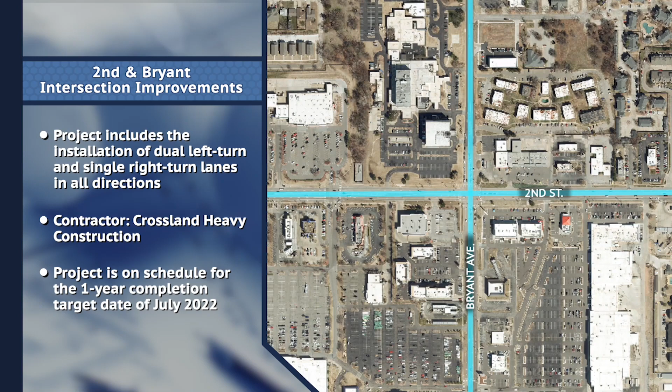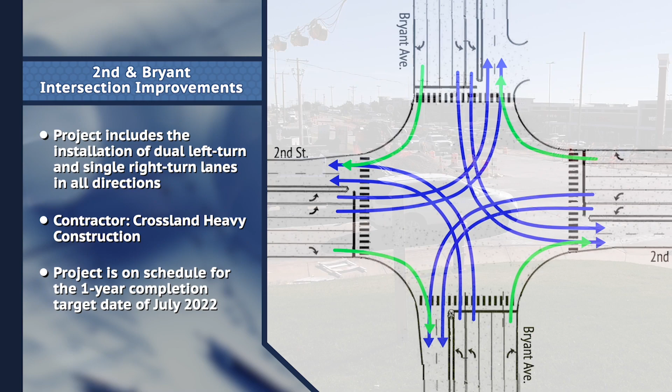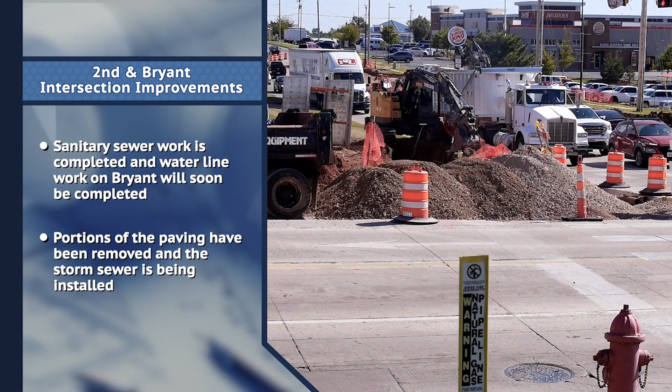The first is an update on the intersection improvements at 2nd and Bryant. As a reminder, this project includes the installation of dual left turn and single right turn lanes in all directions. The contractor is Crossland Heavy Construction, and they are on schedule for the targeted 1-year completion date of July of next year.

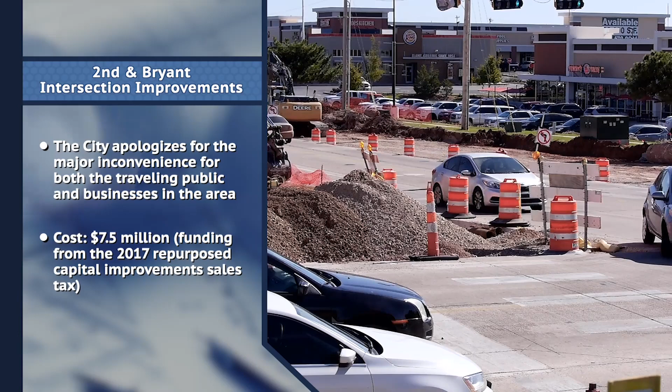The sanitary sewer work has been completed, and the water line work on Bryant soon will be completed also. Portions of the paving have now been removed, and the storm sewer is also being installed. As a reminder, we apologize for the major inconvenience to both the traveling public and the businesses in the area, because it's a rough area right now. But traffic is still moving through it. I went through it again this morning and noticed that you can get through.

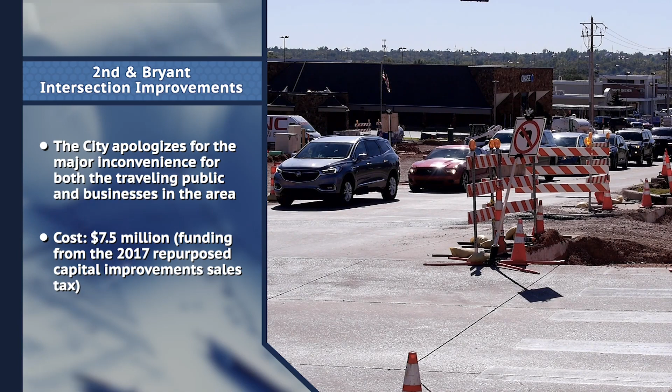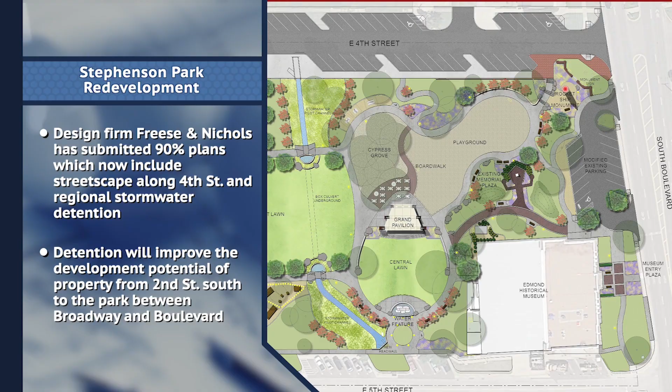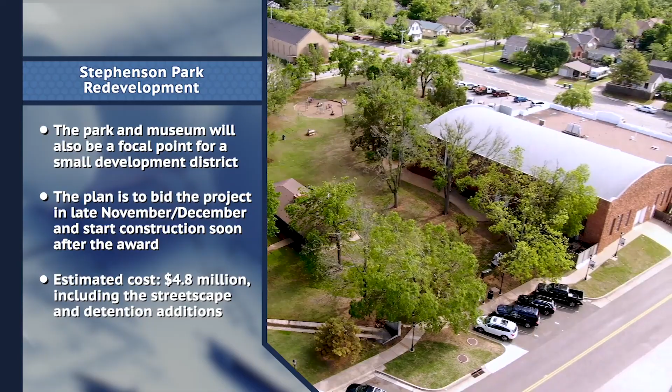The detention will greatly improve the development potential of the property from 2nd Street south to the park between Broadway and Boulevard. And the park and the museum will also be a focal point for a small development district as a possibility as well. The current plan is to bid the project in late November, early December, and start construction soon after that. Our people will know more about the specific timelines as they get closer to the bid date.

The estimated cost of the project is about $4.8 million. That includes the streetscape and the detention pieces that have been added. $3 million of that cost will come from the city's allocation of funds from the American Rescue Plan Act. The rest of the funding will come from the 2017 repurposed capital improvement sales tax.

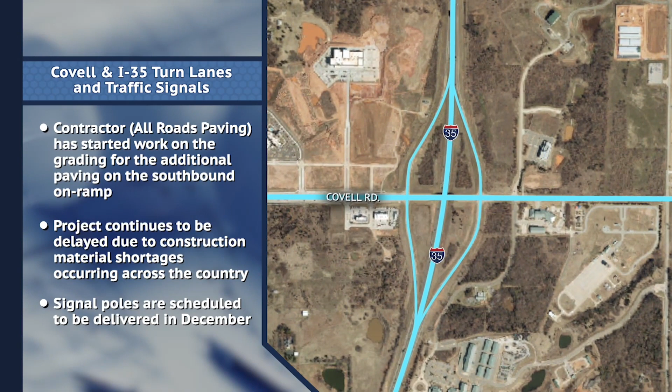The third item is an update on traffic signals and turn lanes for exit and entrance ramps at I-35 and Covell. All Roads Paving is the contractor for this project, and they have started work on the grading for the additional paving that will be needed on the southbound ramp.

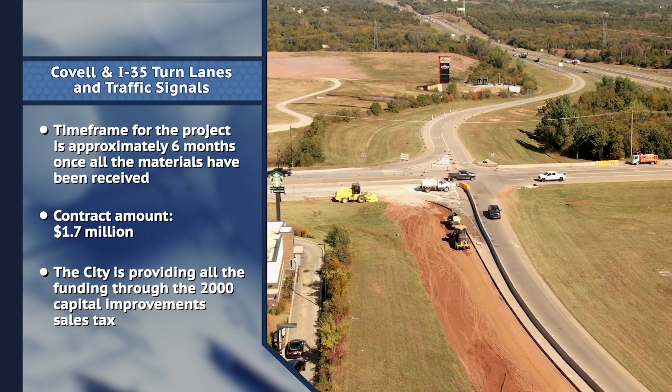Just as a reminder, this project continues to be delayed by the shortage of construction materials occurring across the country. At this point, the signal poles are scheduled to be delivered sometime in December. The time frame for the project, once we have all the materials, is approximately 6 months. The amount of this project is $1.7 million, and the city is providing the entire amount of the funding through the 2000 capital improvement sales tax.

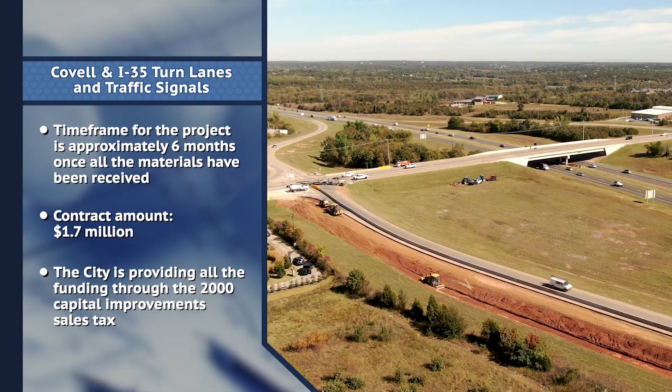The fourth item is an update on our sales and use taxes. These figures are tax collections for August, and it reflects our 4th monthly check of the fiscal year. The sales tax revenue increased for the month by about 7.8%, and now cumulatively for the year we're also up about 7.8%. That compares to a 3.25% budget projection for this year.

Use taxes went up about 11.7%, and cumulatively they are now up about 13% for the year, compared to a budgeted projection of about 10%. Our combined revenue sources so far for the year have increased about 8.8%. So very, very good news for our 2 critical revenue sources.

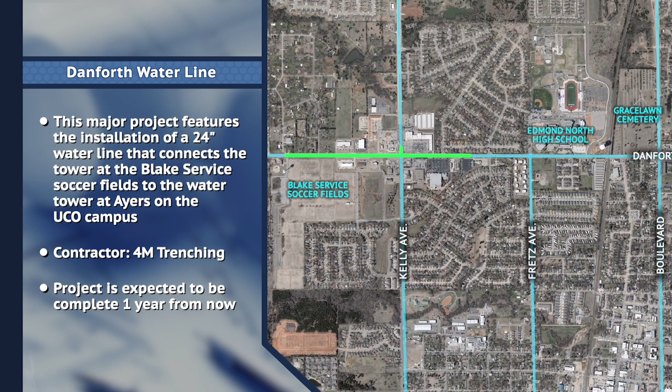And then the last project is an update on the Danforth water line. This is a major project that features the installation of a 24-inch water line that will connect the water tower at the Blake Service soccer fields to the water tower at Ayers on the UCO campus.

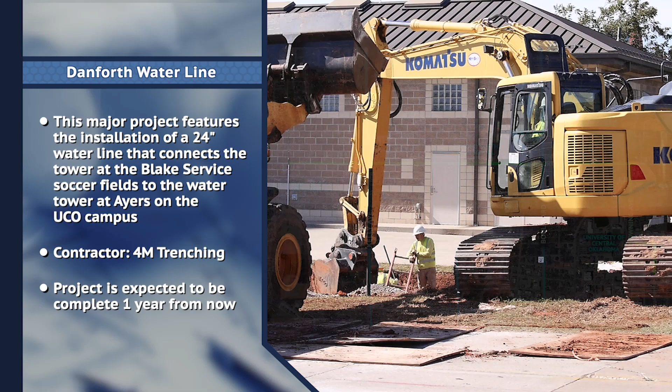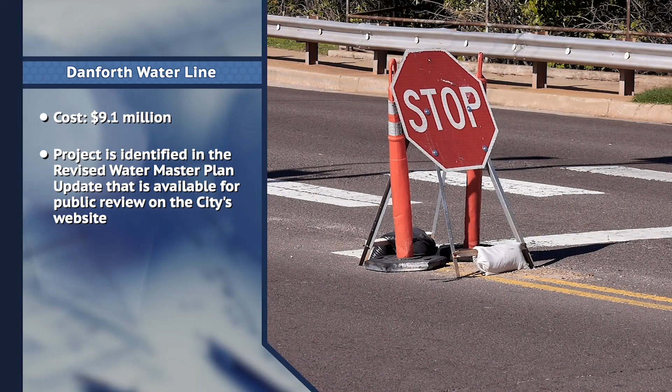4M Trenching is the contractor, and the project is expected to be completed about a year from now. The traffic signal at Chowning should be operable again in the very near future. Sometime very shortly we'll get back to a normal signal arrangement at that intersection.

$9.1 million is the price tag for this project, and it is identified as one of the projects in the revised Water Master Plan update that is available for the public to review on the city's website.